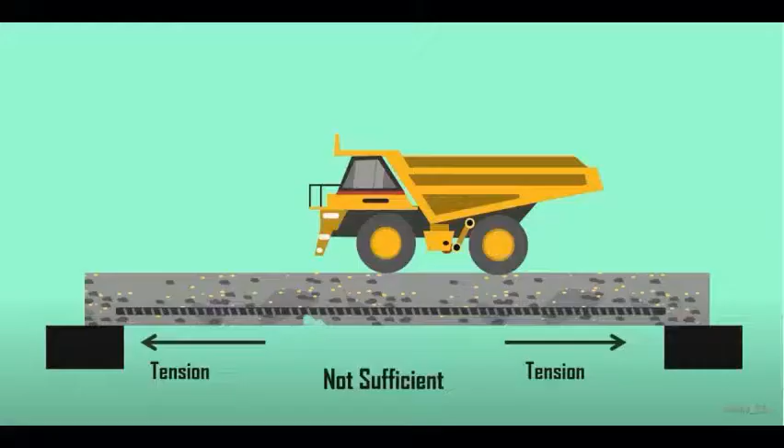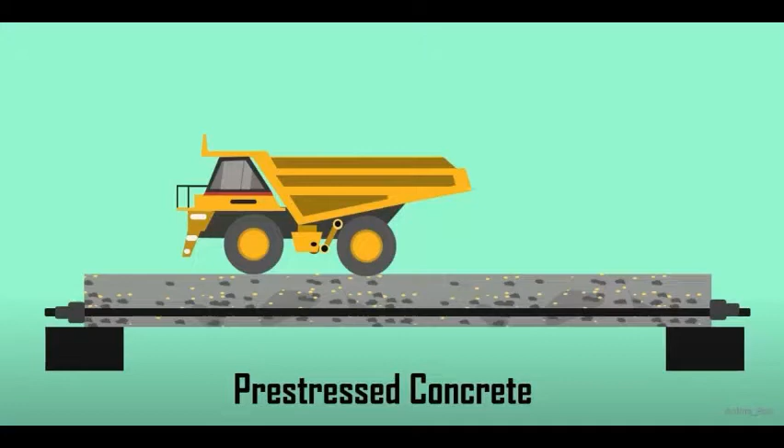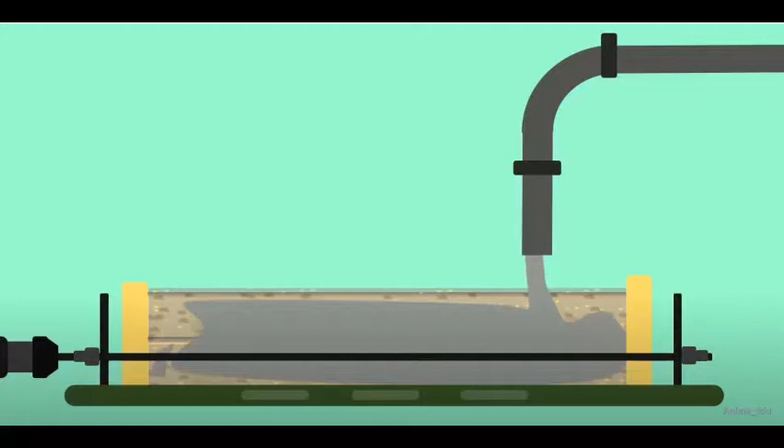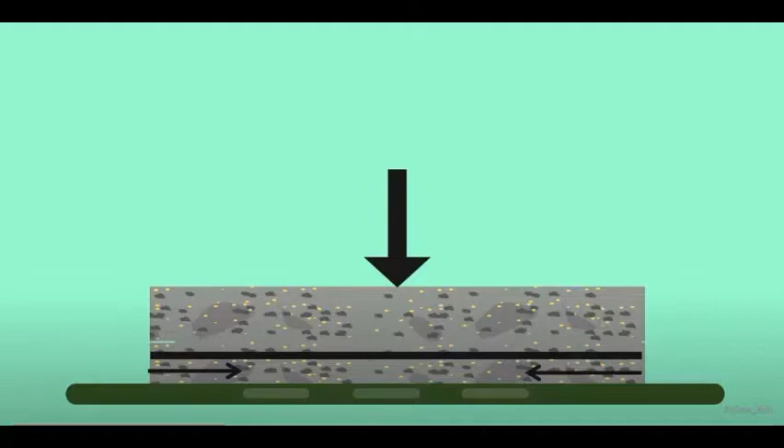Okay, for example, during construction, steel reinforcement bar alone won't be sufficient to cater tensile strength. So the solution taken is pre-stressed concrete is being used. During pre-stressing, the tendon will be stretched along the axis and the cement is poured. When the cement hardens, the tendon is released. The compression will be generated at the bottom. This will balance the stress imposed in the member during the service.

Assalamualaikum warahmatullahi wabarakatuh. I'm Mohamad Nabil and I will explain about reinforced concrete, pre-stressed concrete, with its concept and principle. So what is reinforced concrete? Reinforced concrete is a combination of two elements, which is concrete and steel. Concrete is strong in resisting compression and weak in tension, while steel is strong in resisting tension. Therefore, reinforced concrete was used to resist both compression and tension.

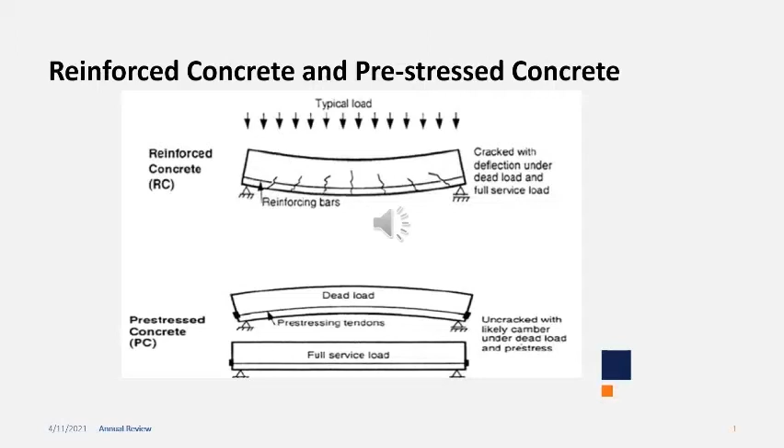So let's go to pre-stressed concrete. Pre-stressed concrete is developed by producing internal stress to counteract the external stress. By this action, it will increase the strength of concrete. So let's proceed to concept of pre-stressing. Pre-stressing is application of an initial load on the concrete structure so that the structure is able to counteract or withstand the stress coming due to service load.

The concept of pre-stressing was invented a few centuries ago when metal bands were wound around wooden pieces to form barrels. The metal bands were tightened under tensile stress, which create compression between the staves, allowing them to resist internal liquid pressure.

Okay, let's proceed to the principle of pre-stressing. Pre-stressing is a method in which compression force is applied to a reinforced concrete section. The effect of pre-stressing is to reduce the tensile stress in the section to the point until the tensile stress is below the cracking stress. Thus, the concrete will not crack.

The concrete can be visualized to have two compressive forces, which are internal pre-stressing force and external force. These two forces must counteract each other to make sure the principle of pre-stressed concrete is applied in the concrete. Thank you.

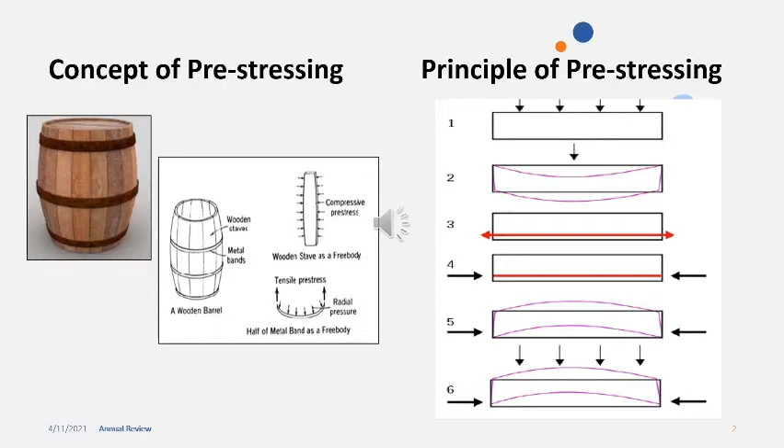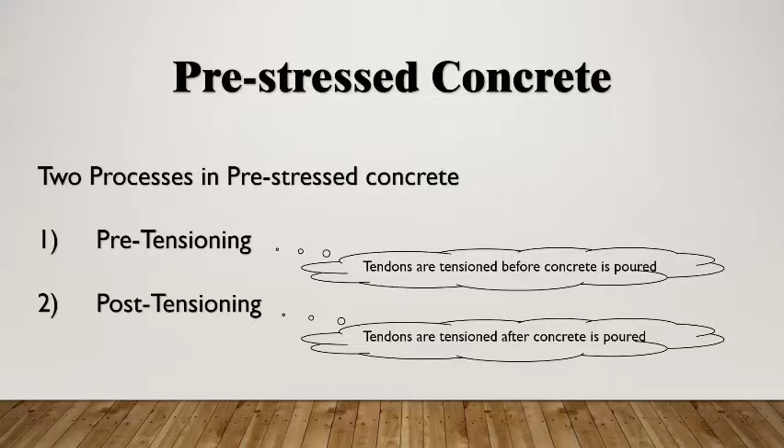Okay, Assalamualaikum warahmatullahi wabarakatuh. My name is Ahmad Nubli bin Yatiman. Okay, for the pre-stressed concrete, there are two processes in pre-stressed concrete, which are pre-tensioning and post-tensioning. Pre-tensioning is a pre-stressed concrete where tendons are tensioned before concrete is poured, while in post-tensioning, tendons are tensioned after concrete is poured. Okay, now let's go to the video.

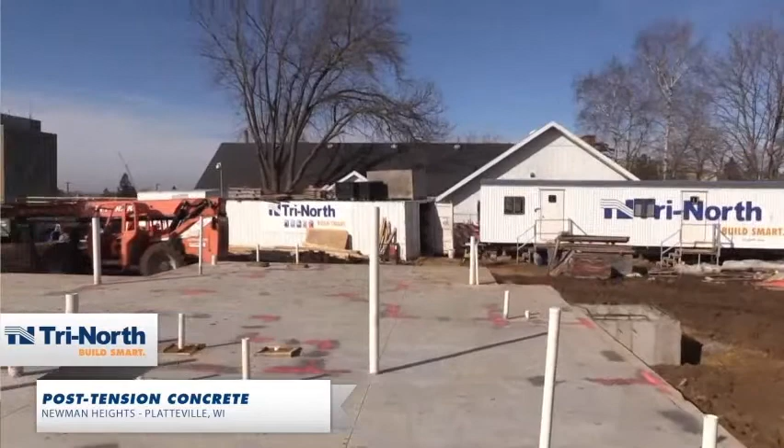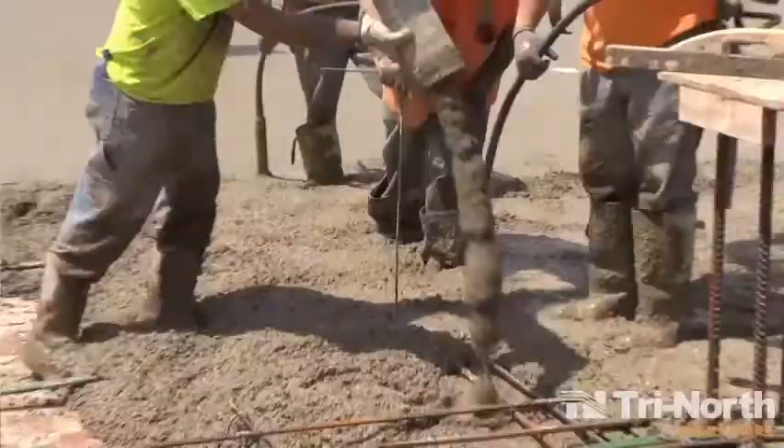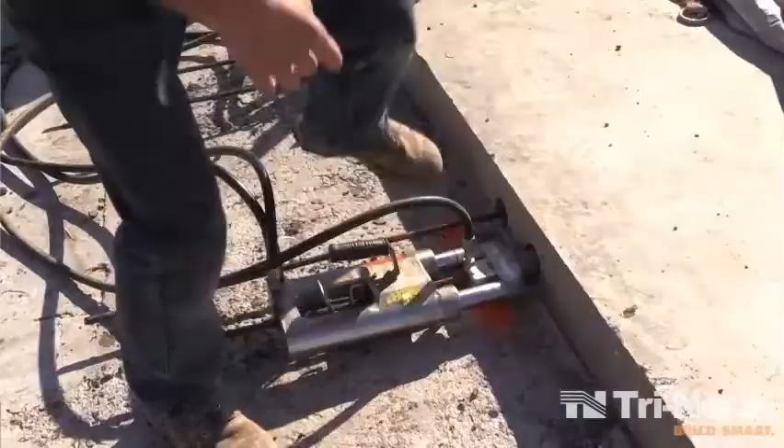We're here today. We're actually starting to stress our post-tension deck here at Newman Heights, Platteville, and I'll talk a little bit about this process. So it just looks like plain concrete to most people, but there's actually a 10-foot cavity underneath here where there'll eventually be parking. And so what we do is we come in and we put shoring underneath here with beams, shores, plywood, and then on Wednesday we poured concrete on here, 14-inch deck. I think it came to about 350 yards, and then essentially it's just a waiting game because we have to wait until the concrete can reach a certain pressure, and then we pull the cables.

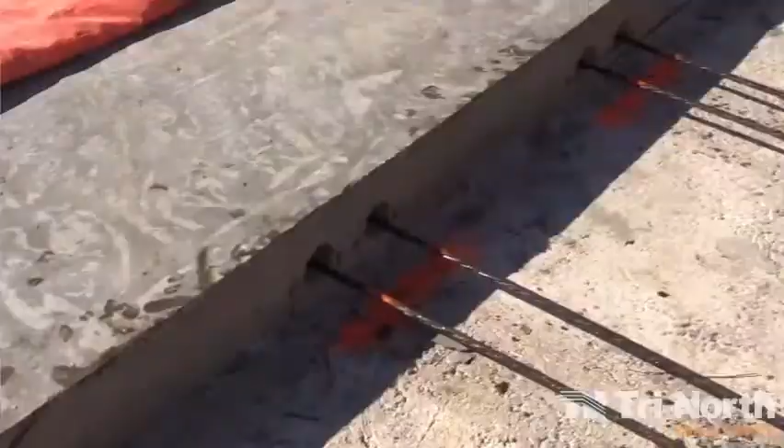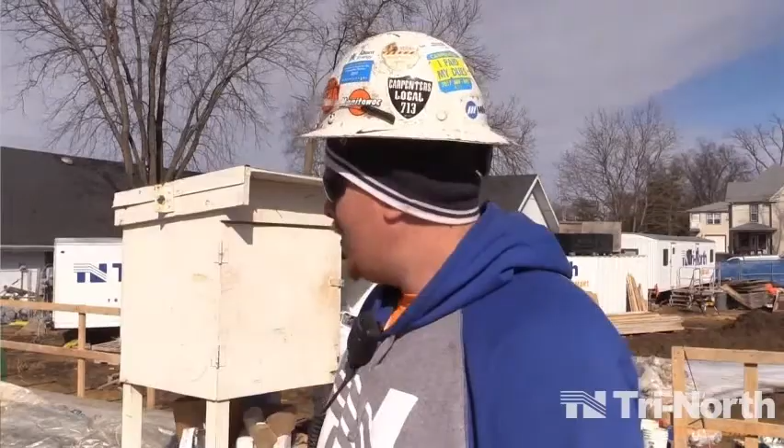Concrete inherently is very weak in a tension situation, but has very high compression properties. So we run these cables through here per the engineer's design, and that allows the building to actually carry on the columns and the outside walls. And so we poured Wednesday, and then we have these small cylinders. We have to reach 3,000 pounds on those cylinders for safety, because when they pull those cables, they put 33,000 pounds on the cable head. So anything less than that will actually fracture the concrete. And so right now they'll go through and stress all these, then we can pull down our shoring, and we'll have a beautiful concrete deck that we can frame off of.

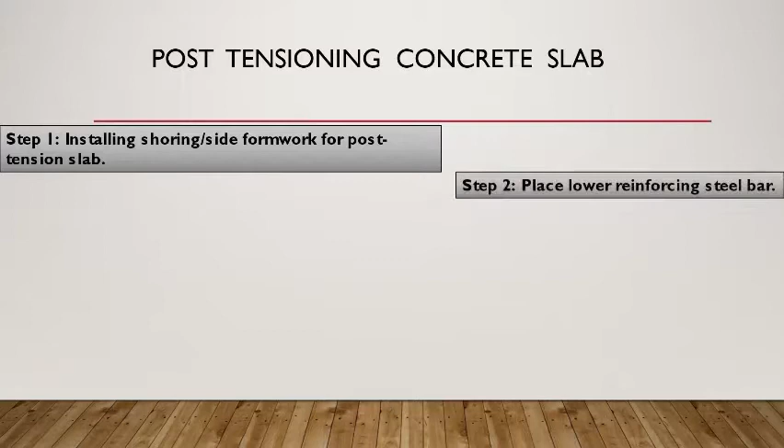Okay, the video is about post-tensioning concrete slab. These are a few steps for the post-tensioning concrete slab. Firstly is installing shoring or side formwork for the post-tension slab. Then place the lower reinforcing steel bar, which is BRC. Then step 3 is lay the tendon for the tensioning purpose. And step 4, set up the anchorage. Step 5, place top reinforcing steel bar.

Then pour the concrete. After pouring the concrete, we need to wait until it achieves specific strength before stressing the tendon. The tendon is stressed by a huge machine, which is a hydraulic jack, at the side of the tendon. Okay, after finishing stressing the tendon, then disassemble the shoring or formwork.

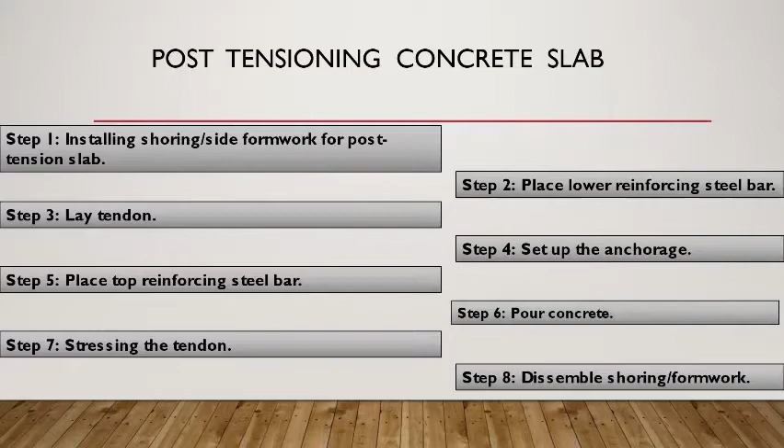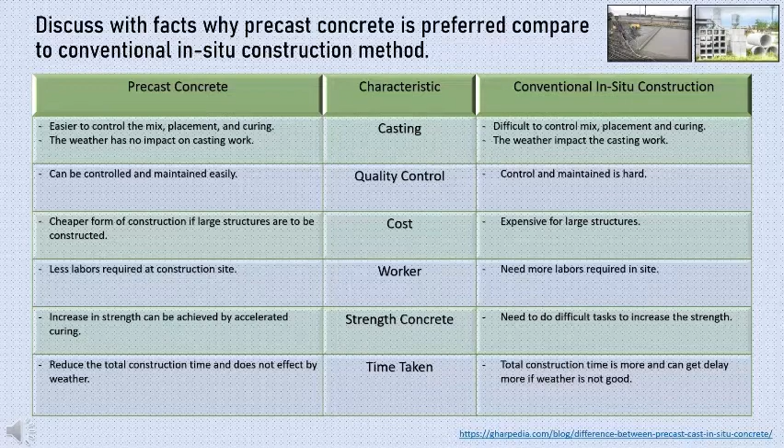For time taken, precast concrete will reduce the total construction time and is not affected by the weather, because in situ construction needs to stop when raining, while precast has completed their work. For in situ construction, total construction time is more and can get delayed if the weather is not good. Thank you.

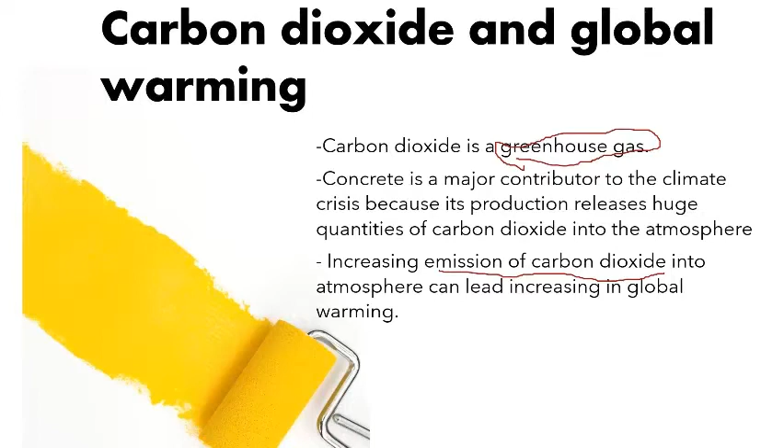Next, the increasing emission of carbon dioxide into the atmosphere can lead to increasing global warming. Next, I want to tell you about a previous study by Yahong Dong. According to research by Yahong Dong 2015, titled Comparing Carbon Emission of Precast and Cast in Situ Construction Methods, a case study of a high-rise private building, the study was made at a small construction site in Hong Kong, where precast concrete has been frequently adopted. The study compares the carbon emissions of precast and traditional cast in situ construction methods based on a private residential building in Hong Kong.

As a result, it was found that the carbon emission of the residential apartment is 669 kilogram carbon dioxide equivalent per 1 square meter floor area. Precasting can lead to 10% carbon reduction for 1 cubic meter of concrete. Steel formwork for precasting performs better than timber formwork used in cast in situ concrete. Adopting more precast concrete can lead to less carbon emission. This is from Yahong Dong's research in 2015.

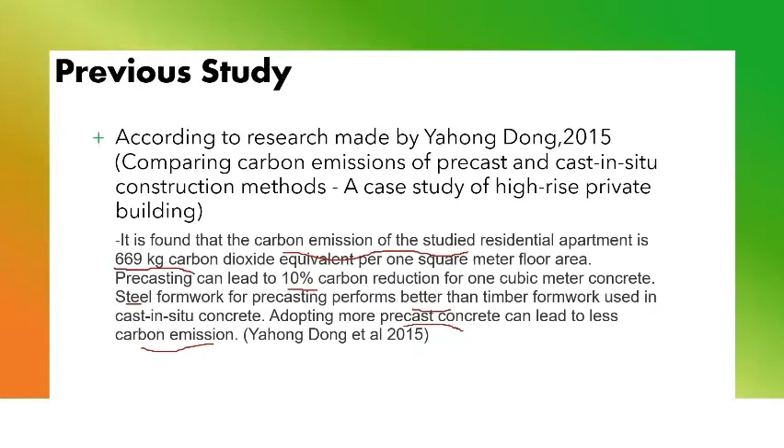Now I will explain how precast concrete can reduce carbon dioxide and global warming issues. Precast concrete production is done off the construction site, in climate controlled factory conditions where critical factors like temperature and humidity are tightly regulated. Next, precast concrete is even stronger because it is manufactured in a controlled environment with more exact mixing, molding, and curing processes. Next, precast's eco-friendly characteristic: globally, efficient use of energy is the key in limiting the impact of climate change.

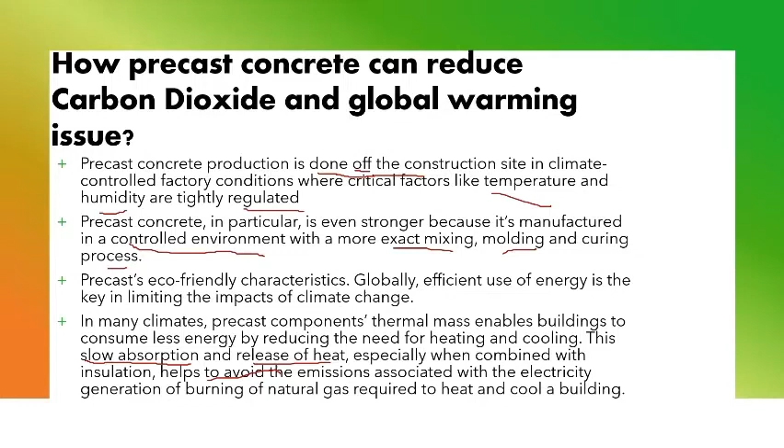And lastly, in many climates, precast component thermal mass enables buildings to consume less energy by reducing the need for heating and cooling. This slow absorption and release of heat, especially when combined with insulation, helps avoid the emissions associated with electricity generation or burning of natural gas required to heat and cool a building. As a conclusion, based on the research findings, it is highly recommended to adopt precast concrete in building construction. The building industry should consider carbon reduction as a benefit of implementing precast concrete.